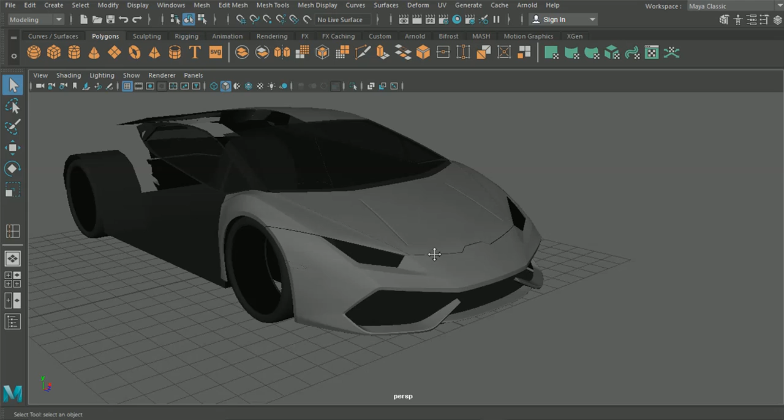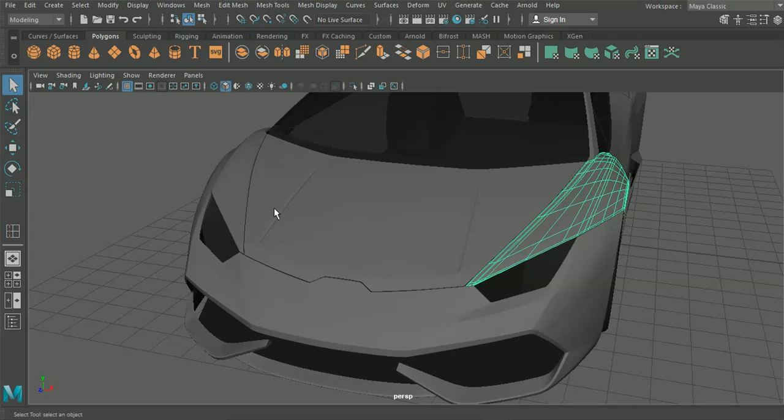We made a load of progress in the previous episode. We have our two wings done, our bonnet done, and our front bumper done, and they are looking really good. In between episodes, I copied these two sections, merged them together down the vertices, and combined this section here, merging it down the center for the vertices as well, so now they are one complete part. I've left these two separate, but they're still an instance of each other, so when we properly smooth this section, we'll do the exact same there. So we're looking pretty good just now.

In this episode, hopefully we are going to get as far through the door and the side as possible, bearing in mind that we have the handle to make, which may take us some time, and then hopefully go around the back. I am going to sit here today and make videos over and over again until we get the base, until we get the actual shell of the car done, ready to move on to all of the little details around the back and the front.

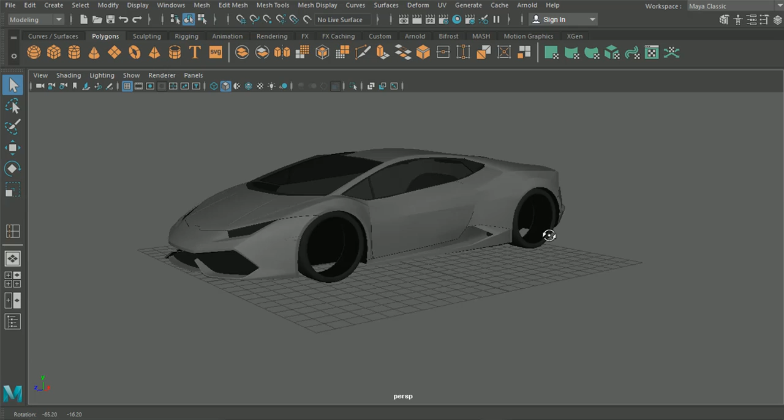So what we're going to do is maybe work on the side skirt here first, and then we'll do the door in this episode at least, and then we can crack on maybe along the roof section and down the back in the next episode.

So let's have a look at what we've got here. We've got this section all smoothed out and looking good. On the door, let's have a look at our handle here, let's see how this is looking. Okay, so it doesn't look like it's going to be too difficult. We can run a line here, go around this edge, extrude in slightly and extrude back out, so it's not going to be too tricky really to get that done there.

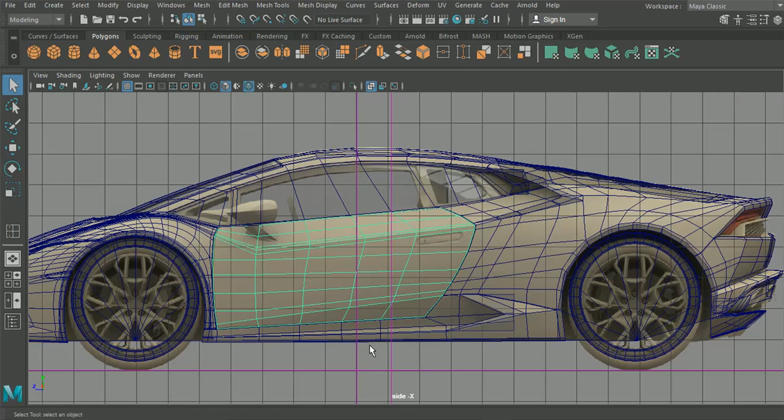So that's good, but we'll work on our side skirt here first, and in doing so what we'll need to do is add in just a little bit of detail. For the most part it looks like it should be pretty good. Let's see what we've got here, so we can see that we're kind of curved there as we go down.

Let's see, under smoothing right off the bat, let's see how we're looking here. So it's looking like that curve there might actually be fine, we may not need to actually add anything to pad that out, so that's good.

So what I think we'll need to do, let's see, we've got a little bit of angle on the door down here. We've got angle on all of these sections here. So let's have a think.

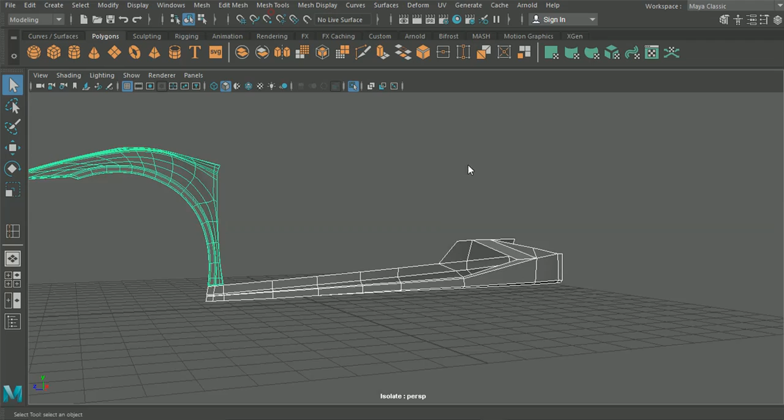So this bit's going to be a little bit tricky here, but once we've extruded in, I think what we'll do firstly here, let's take this with us. What we'll do first here, as opposed to what we did last time, is we will extrude all of the edges in.

So I'm going to take all the sections in here, we'll even do the insets there, that should be fine. We're going to control... oh, actually before we do, we're going to want to actually bridge this gap.

Let's push this in over there. What we'll need to do in order to do this is we will need to add a section around here, and in doing so, let's just pull that out just to add to the curvature of that section there.

Which is fine, and then what we can do is, if we extrude this bit here straight up, we can merge these vertices into position here, and merge this one down here. Cool, okay.

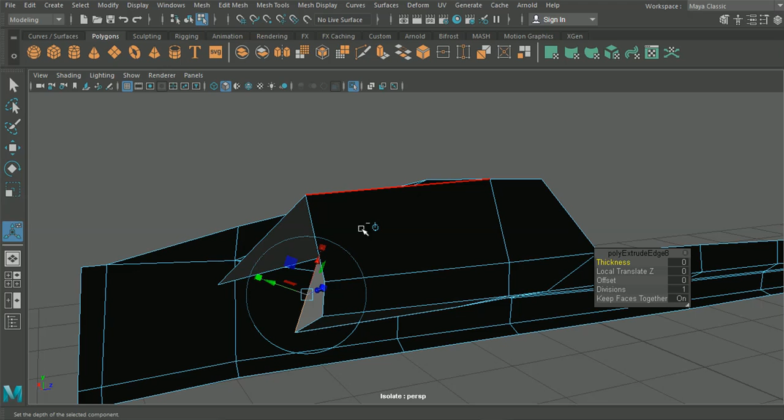And we're just going to make this into a triangle for now, so we're going to bring this point down here, and we can merge it down there. Okay, so we've done that just so that we don't get a straight edge on here, so we can see now that should go around a little bit nicer. And then the dodgy straight edge is going to sit down there out of view, so that's fine.

Okay, so what we'll do then is we will take the edge in as planned. You can see now that none of that's selected, it's only the actual edge that we want, so that's perfect.

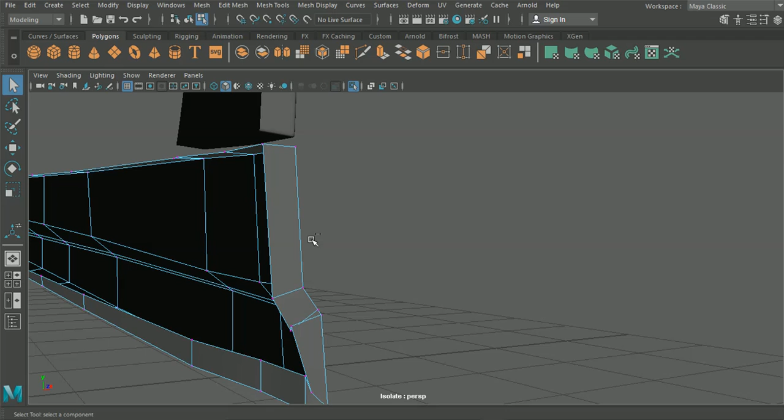We are going to Ctrl E to extrude this in, and then we're going to pull on that blue axis again just to make sure that we're going around all the bits that we need to. And now we can come in here and we can clean up our sections here.

Now I'm on the component view inside my move tool here. You can select this point.

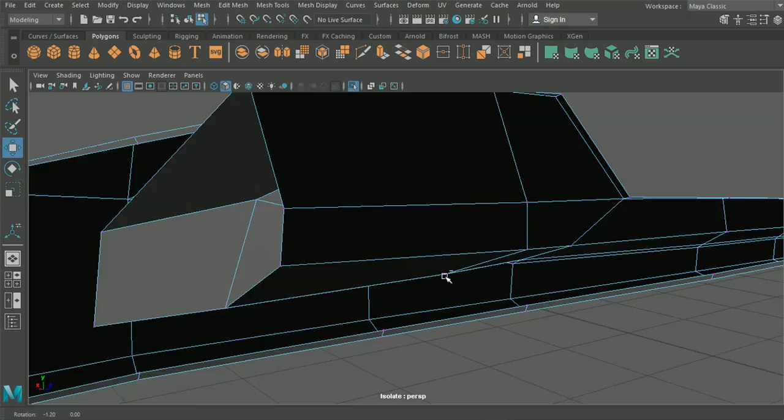So that looks pretty good. Maybe with these points here, we go out of the component view, back into our world. I think with these ones here it might be better if they're straight. So what we can do is we'll merge them to the points and then we'll just drag them on the x-axis here to make sure that they're absolutely straight, because that's where the panel for the body section is going to actually meet here.

It's probably a good idea we did this first, as that would have been quite messy to clean up afterwards. So that's looking pretty good.

So now we're going to want to insert our edge loops. Firstly, we're going to want one that runs all the way down this edge here. You can see that that's stopped, so we must have had vertices inside here that we didn't need. So we're going to highlight that edge there, and I can delete edge and vertex, and we'll try again. Perfect. So that's going to run all the way along there, which is fine.

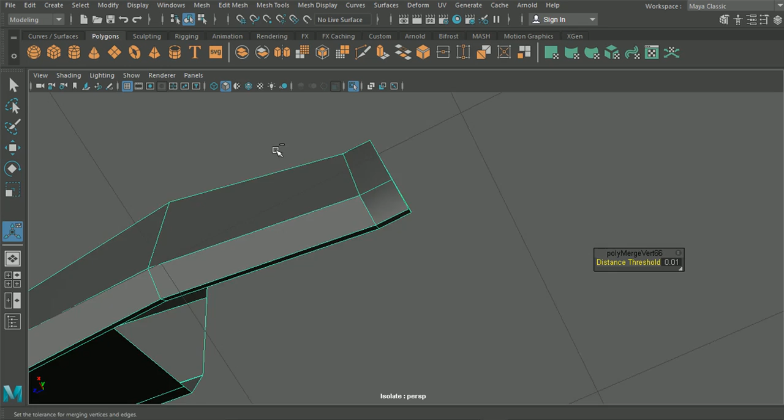So if this doesn't work here, I will have to rebuild this section. Just dropping these in here and merging these two new points.

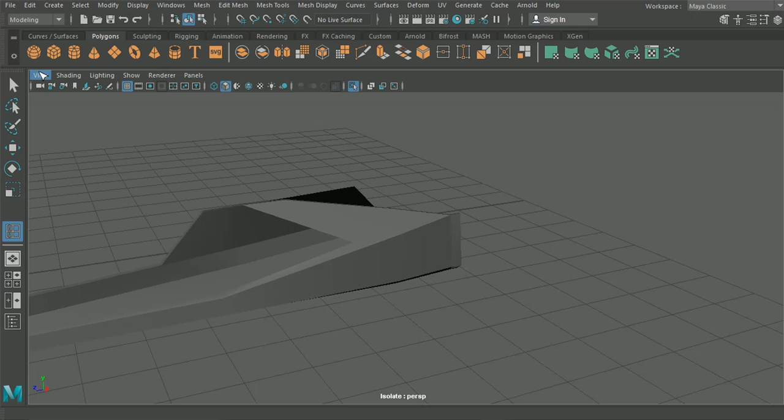Okay, so it looks like that might have fixed our issue. There it goes. That's good enough. So it must have been just an issue when I combined the two points together back in the day, but it's looking okay just now.

Let's just make sure that I'm liking this curve that we have here. Okay, so let's test that again. So we can see now we've got a nice straight line running across here, a straight line running across there. So if we have a look back inside, we'll see that it looks like it is actually considerably straighter.

So in order to make this a whole lot straighter, let's drop that in there just now. We're going to drop one on top and we'll drop an extra edge on the bottom there, just like we did with the front bumper. So we'll see now that that is an incredibly straight line, which looks great.

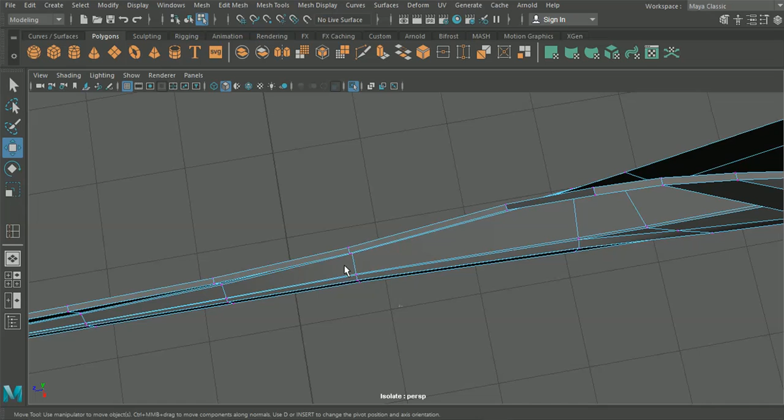Now this is going to be an incredibly straight line because we do need to have a few edge loops down here. We need to have one that goes straight through here. Now before we do that, notice that maybe this edge here - let's just check that I'm on the world view. Yep. Needs to come out there.

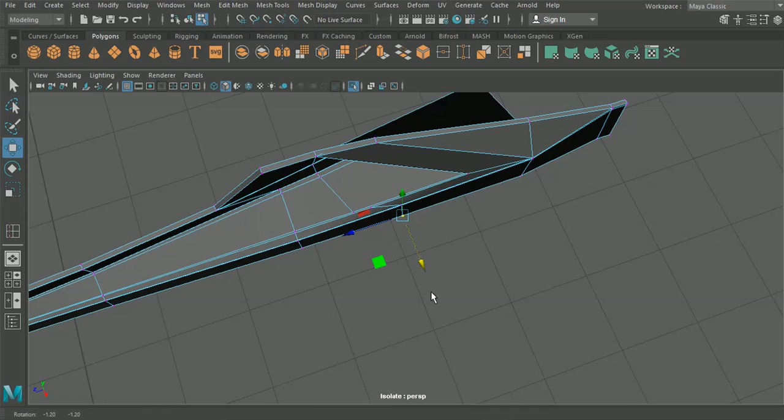This one as well, it's just a little off in this angle here. So we just always want to make sure that the mesh is absolutely perfect before we go down this road, because the problem is as soon as we start adding edges after edges, it's going to make it incredibly awkward for us to actually pull and push minor points. So we want to make sure that we're looking good before we start.

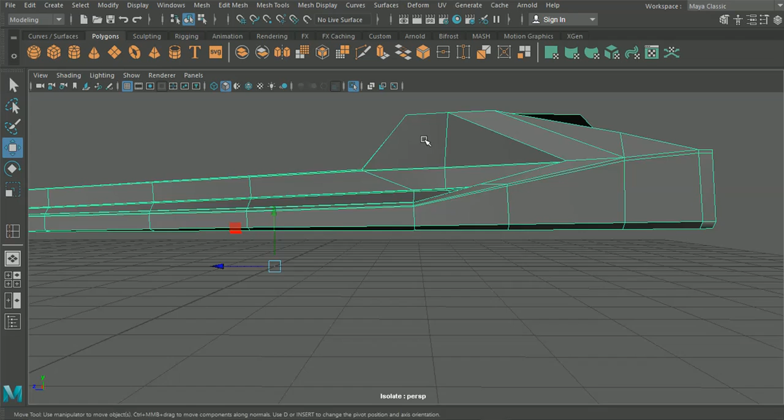So that's looking good down there now. And we're going to want an edge that's going to run up and inside here as well, and one that goes down there. So firstly we'll drop one here.

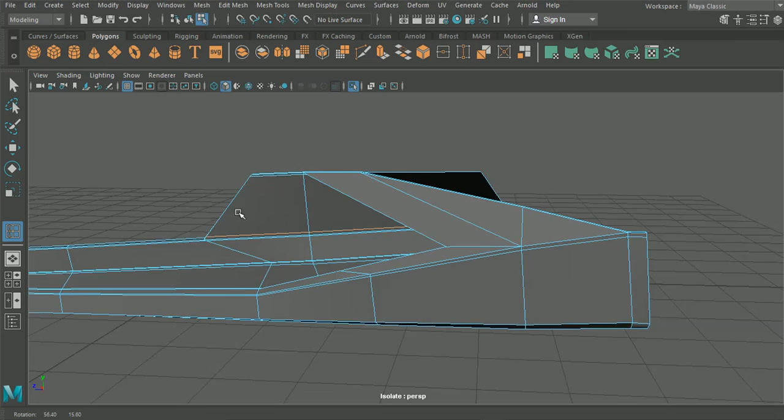Okay, we'll drop one just here, just a little bit, not too close to the door there, because we know that we don't want that to be completely straight. Let's see. I'm going to want one here.

I think what we'll want to do with that is we will want to bring that down here as well, because again, we want this panel here to be fairly straight. So we'll do that, and then we'll merge the two vertices here.

Pull that out just to make sure that we've not compromised the section.

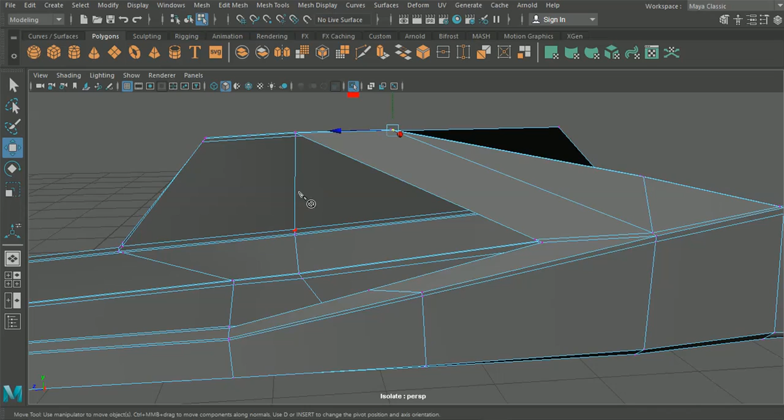Okay, we are going to want to add a line on the inside of this edge here. Now, we're going to do that, but we don't want the line to actually run down here, because we don't want to end up straightening off this edge as well. So, just add a bit more shape here.

So what we'll do is what we've done in the past, and we're going to go part of the way down here, and we'll do the same, going part of the way down here. That will allow us then to use our edge loop, and it will allow us to go nice and close to this edge here.

Oops, wrong edge. Oh, okay. So, because of the awkwardness of that, we can't actually do that plan. Let's get rid of that.

So what we're going to want to do here then is maybe let's run one up the outside and we'll see how good it looks. Let's run one up here, just like that.

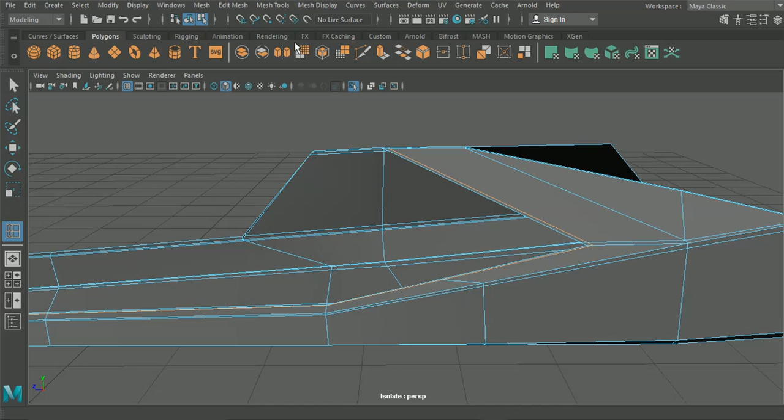Okay, so that actually looks quite nice. So we can see that that's going to maintain this edge. We don't want it to be any sharper than that, so that looks perfect. See, that whole section there is looking pretty good.

Now, to me, it looks like this edge here - let's see if we can get this on a good component angle.

What we're going to want to do, I think, is remove these edges up here, because we're going to want to maintain that angle there, but we don't actually want to have the crease that's going to come with it in terms of the smoothing of this section. So we've lost a little bit of the crease, but we've also lost a little bit of the angle there, but when we double smooth that, that should be fine.

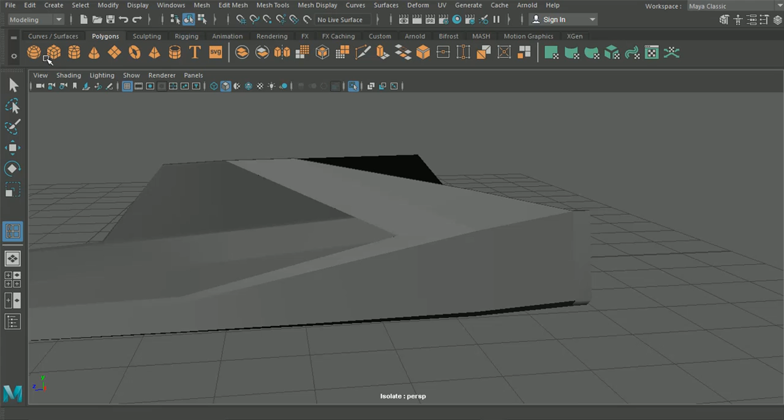is we need another mesh edge loop here to go down this edge. Okay, so we can see now that we've got that bit there, but we can actually see that this is now going underneath, which is definitely not what we want. So we can pull this point out here.

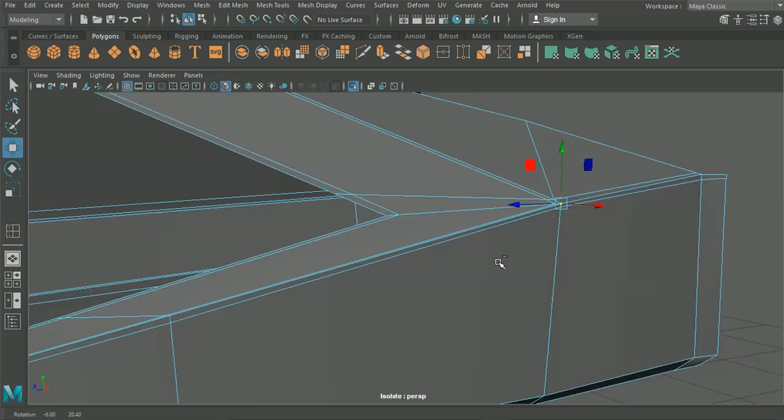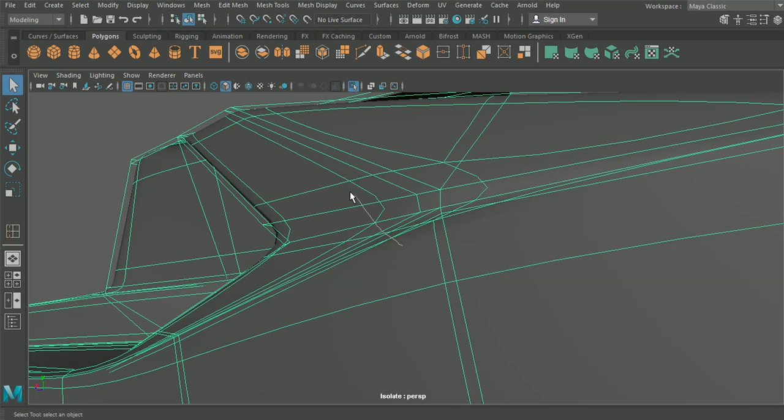It's a little bit better, but I still see a problem here. It's with this top line.

So maybe let's bring this point down. Let's take this point away. It's a little better.

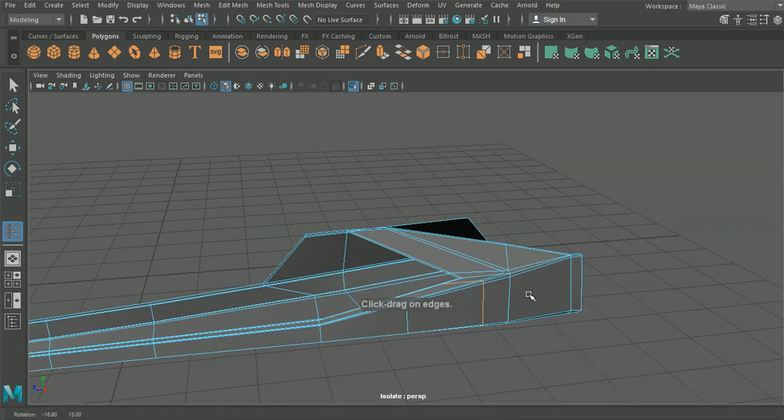Could try dropping a loop inside here just to kind of help the structure of that section. Okay, so that's made it a whole lot better there. That's good. Okay, so that's looking good to me.

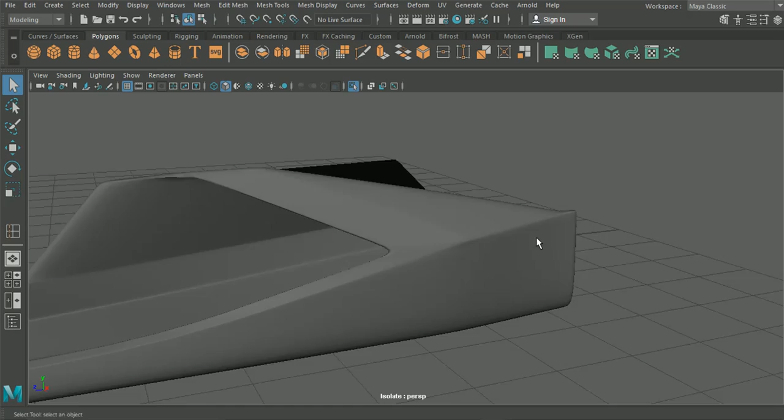It is a little bit messy here now, but once that's smooth it's looking fine, so that's what we want. Let's have a look here.

So looks like what we want to do now is insert our edge loop here and here, and we'll also want to get one here, go underneath it, and here.

Yep, and then finally what we'll do, two more, we will insert an edge loop here and here to match what's in the door, and then we'll pop one here.

And then we can see there that we've started to take that down, but it has actually merged down there, which is perfect.

Okay, so we can see there, that's looking quite nice over on that edge. Let's check around here.

Okay, so we can actually see that maybe we don't actually need that line down that side there. So maybe if we go back, we will take away the line here. And maybe we do actually. Yeah, we'll keep that for now, and we can edit that after should we need to.

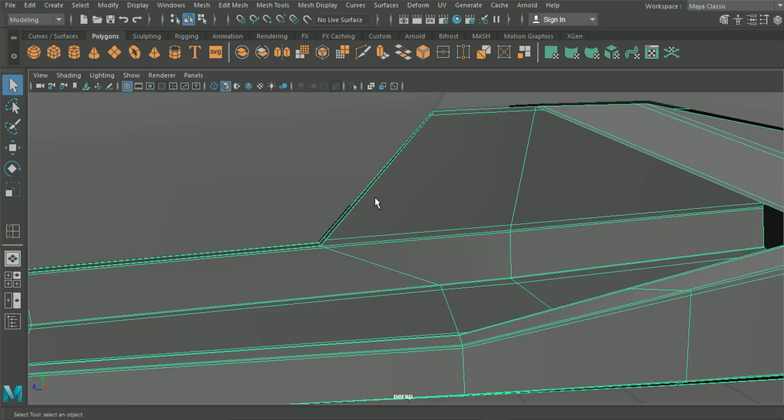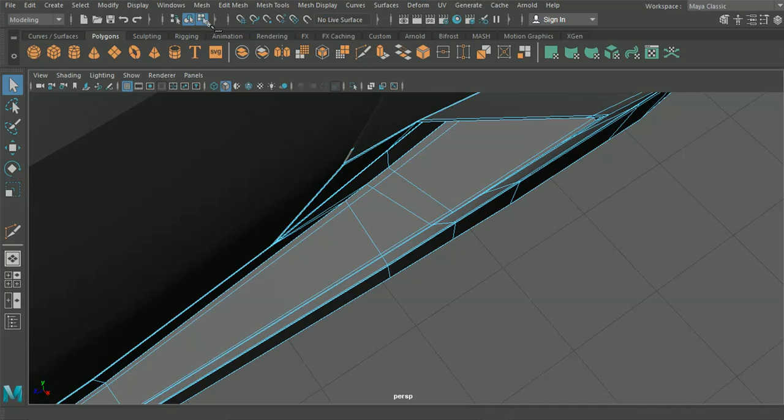Okay, so it looks like there's gonna probably be an issue here going down this door section. So what we'll want to do here is drop our point in the middle here. We'll insert an edge loop all the way down here, and then just like before, that's going to give us a much straighter edge down there.

Okay, and what we'll actually do as well is we're going to take these points here - hopefully we'll get a good angle on the component - we're just going to pull them up, and these ones here.

Don't really want that straight edge carrying all the way through there. Got much more of a smooth curve there now. Okay, so that's looking pretty good. It's not looking too bad just now.

If need be, we can make a few changes in here as we go. Let's push this up. We'll actually bring it out just so it's not curving so much there. It's better.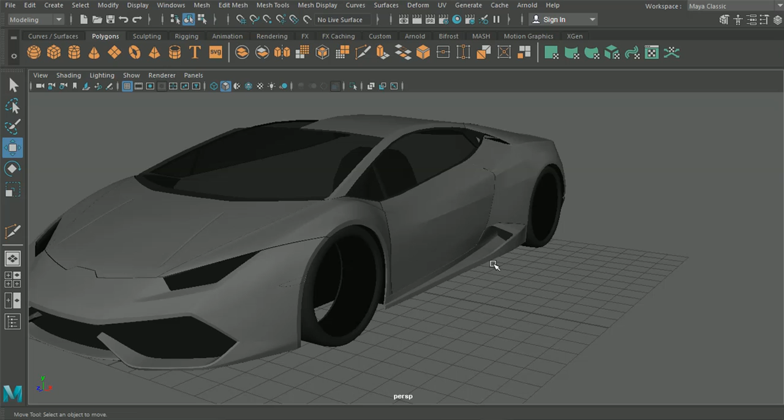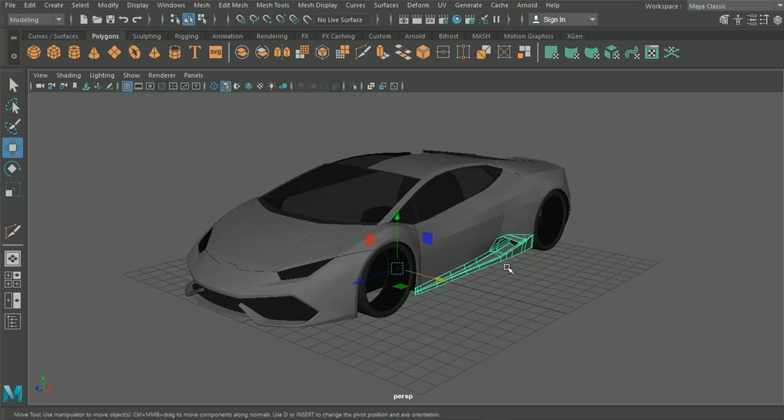Okay, so that's looking good. I think we forgot to duplicate this, so I'll do that just now. Let's take that across there. So see that we've got some nice smooths. We can see that we're making some decent progress down the car just now.

So, onto the door. And what we're going to want to do here is we are going to want to bring these points with it.

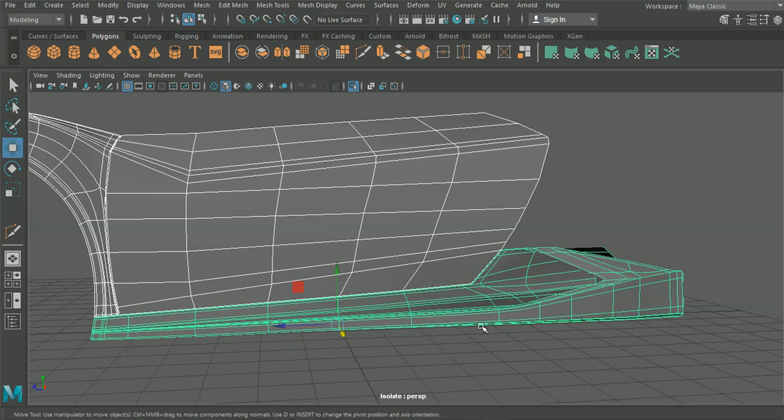Okay, so that side skirt's looking good. It's not perfect, but in the interest of time, what I'll do is in between the episodes I'll do little tweaks there, bearing in mind that this is quite a quick build in general for this whole tutorial for this car. So what we're going to want to do is unsmooth these sections so we can see where we need to add the extra geometry going forward.

So we know firstly that we have some lines coming down here. So we will do that.

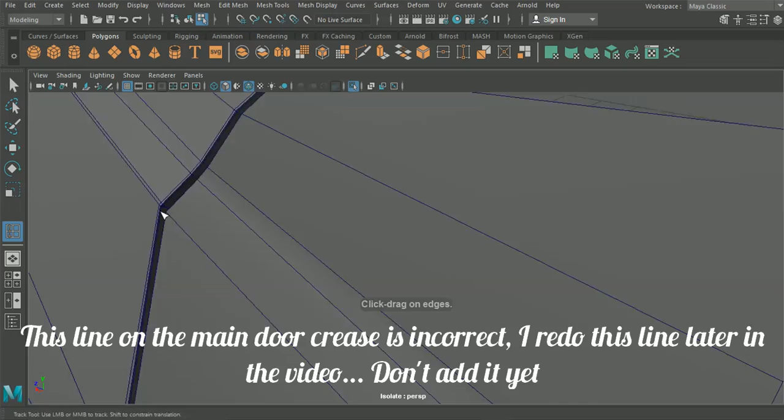Insert an edge loop here. And it looks like, where did we put that one? Put it on the inside. So we'll drop that line in here.

Nice and close, so that's going to follow that curve all the way along there, which will be perfect. Drop one at the top here. And drop one down here, top, and then again along the bottom.

Now we know that we have an edge in here. I think it's this line that we want to maintain. Yep, so see that we've got that crease there. So firstly, what we'll do is we'll try doing it with just the one line here.

But if we're going to want to match geometry, we are going to need a line running across the top section here on this element. So what we'll do is we'll put one at the top as well, nice and close there. Just to make sure that we've got a nice defined line there.

So we can see that's fairly defined, so we might need to edit the points and positions of that as we go. Okay, so follow these out slightly, and then all of these out slightly less.

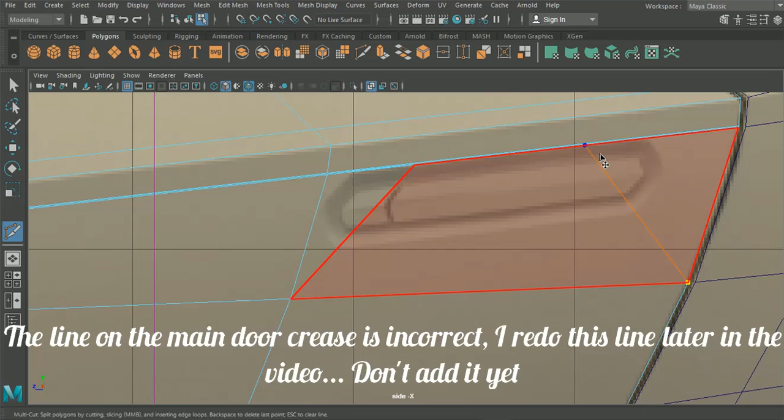And it looks like we're going to need to put one straight down the middle here. So it looks like we'll need to go from here to here.

So we'll go down here as well. Maybe not, maybe not.

So what we'll do is we'll go from here to this section, around to here, up to here, here, and then I think we'll just merge there.

So we can delete this, this, and this, and then we can get rid of any vertices that we don't need at this point here. Looks like we didn't quite go as far as we should have, so something like that.

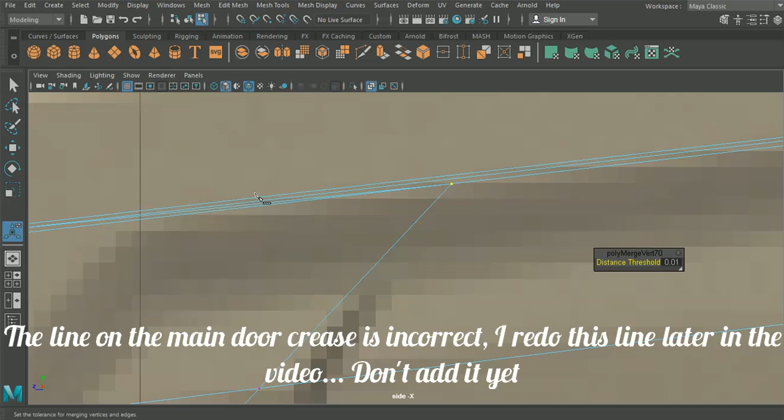So we'll go here again and here. So I want to make sure that we're on the outside of this extrusion here.

Good, that was better than last time as well, so that's perfect. Put this away. And again, we'll get rid of any vertices that we don't need.

And before we actually do this handle, what we'll do is we will insert all the edges around. So, pop one here, that one can come all the way up to it, that's fine. And then we'll need one that runs all the way down here.

Now, the one that runs all the way down here, we're going to need to run around here as well, just to make sure that we're keeping that mesh nice and consistent.

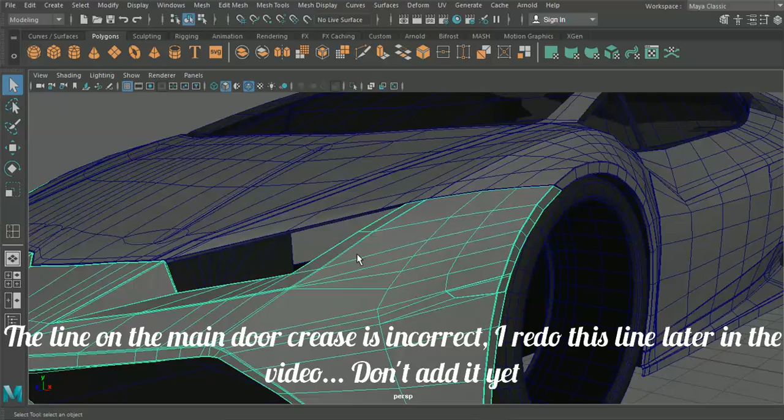Which means as well, we're going to need to run around this point. So we'll run that up and along here, so that needs to now run down here.

Okay, that looks fine. You'll see on the door here as well that that will have just strengthened that edge even more, which is perfect. And what we can do is we can drop all these points together.

Okay, so we can see there the edge is still completely maintained, so we haven't affected anything there. We shouldn't have. And before we crack on, it looks like maybe a little bit too much of a curve

in this section of the door. So what we'll do is let's grab these points here, grab all of these and we'll pull them out. We'll grab all of these and we'll push them in.

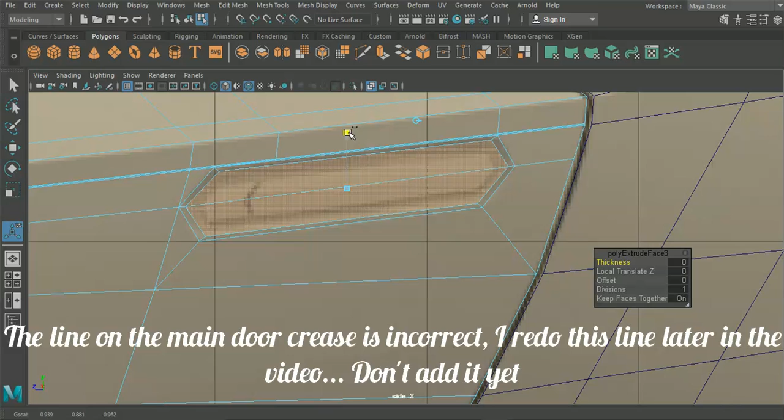And then we'll want to Control E again, and it looks like this time go down just a little bit. And let's just make sure that we're looking good before we crack on.

Okay, now we can select these faces again, and this time it looks like we want to extrude inwards.

Take the faces on the extrude again. We just want to come in slightly here, so we're going to edit these sections.

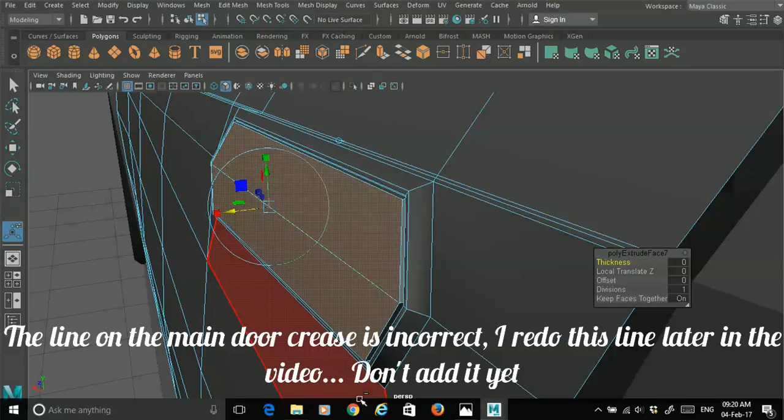That looks like it should be fine. And then

what we'll want to do is we'll want to insert now a bunch of edge loops just to maintain what we have here. Now what I'm actually going to do is I'm going to put 2 in nice and close to this edge here, 1 up here.

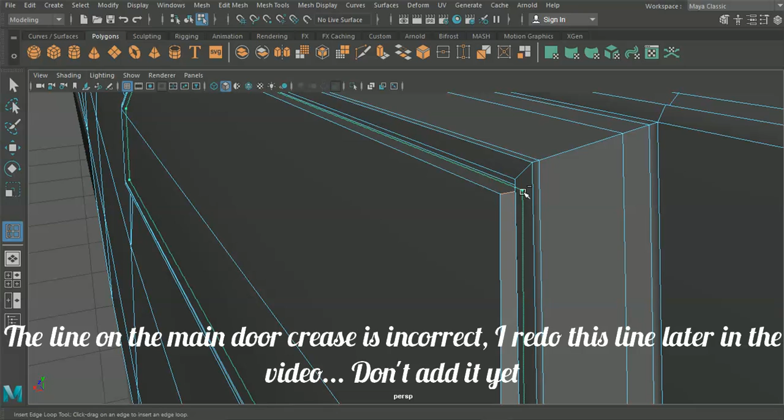So we do that one. Let's see if this is fine. Maybe not actually. Let's put those in there.

We need to put an edge loop in on all of these extruded edges inside here.

What we'll do with these is we will extrude one more time, ever so slightly just there, just so that we get an edge that's going to run all the way around the outside of this handle as well.

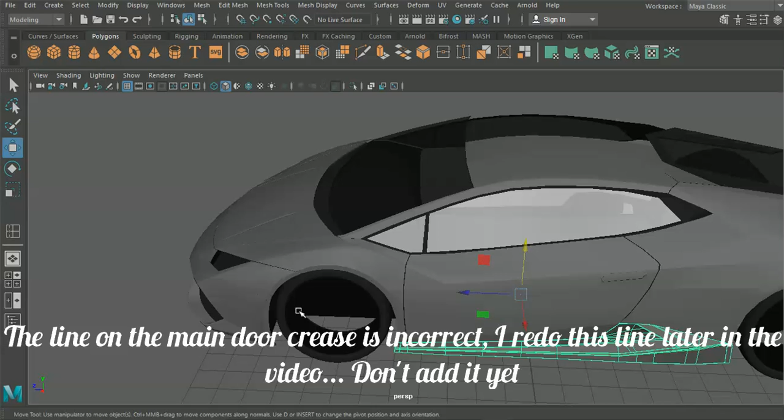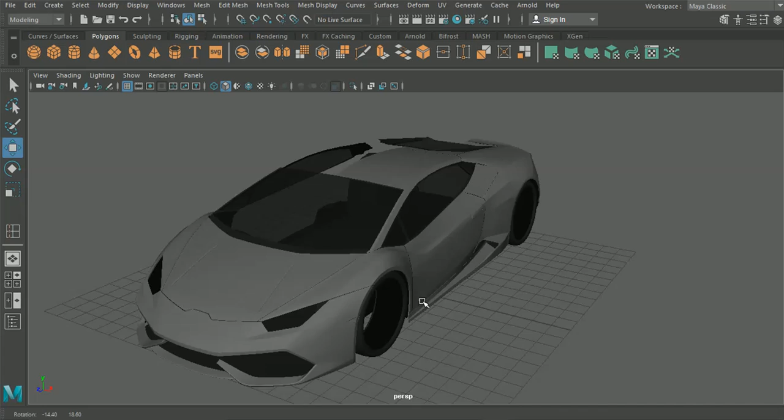Okay, so that's looking pretty good. Let's check. Looks like maybe we've actually...

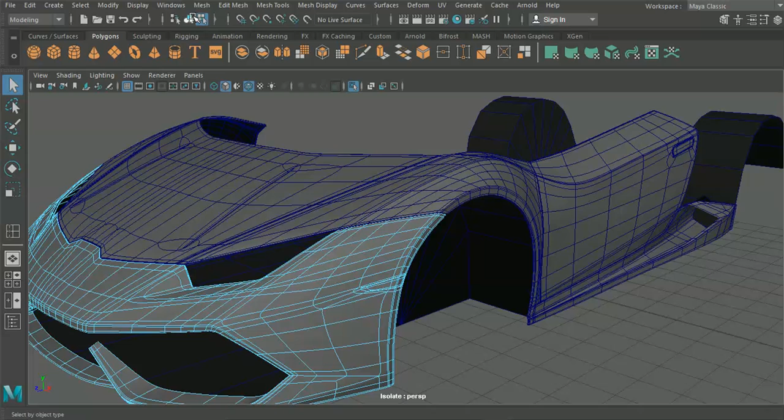So we can see now we extruded in as well, added all the edge components inside here so that we have a nice matching door panel with our edge along the bottom here and our edge along the top. Okay, so hopefully that video didn't put you off, and in the next episode we'll be looking at maybe going around the roof. Cool.